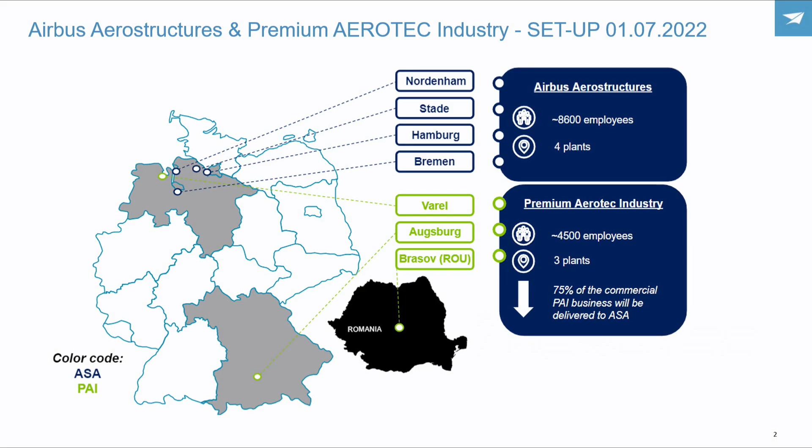Why do we do additive manufacturing? Why did we decide in 2013 to go for that? Sustainability was not the major case in 2013, of course, but if you imagine the standard material processes like casting or forging and so on, of course they are characterized by high energy consumption, and additive manufacturing provides an opportunity to much improve that energy balance, to get rid of the energy consumption, to get a smooth digital workshop, at least in the first case, if you don't look too much into the follow-up processes. So you get safety value streams by applying additive manufacturing. So that's where we go.

And you can see from the pictures, we are working with GE Additive or Concept Laser machines from the start to now, because it's a long story of continuous improvement on the machines you have to perform in order to get aerospace parts done at the end. So as I said, 10 years.

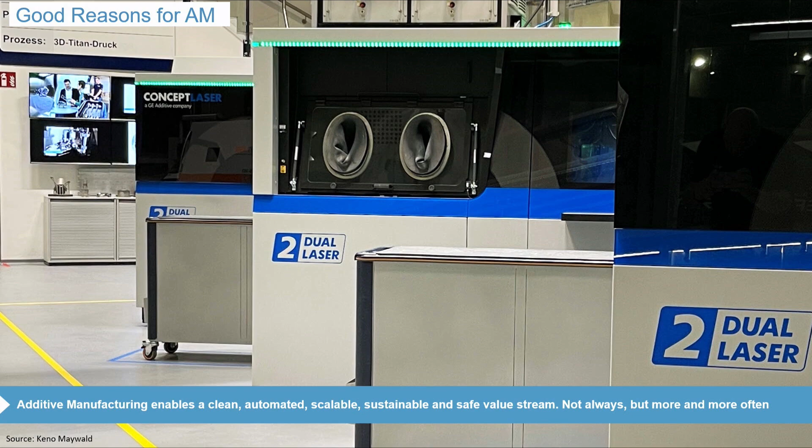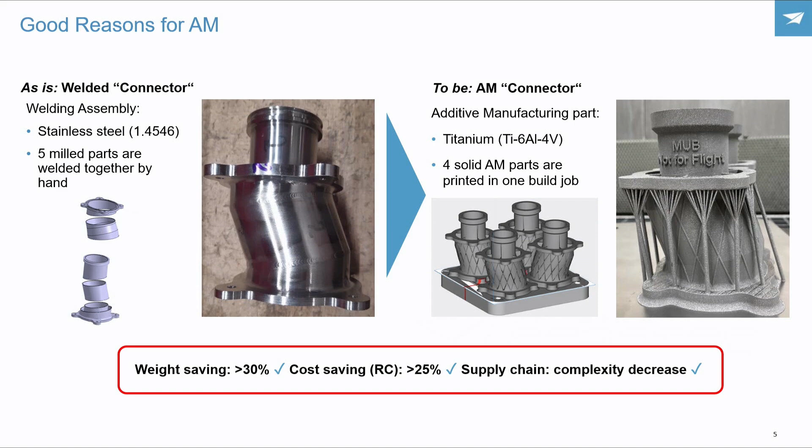And again, why? I think we heard that very often up to now. Aerospace business should be one of the best cases for additive manufacturing, since the number of pieces is always rather low, so small series production is prevailing. For safety reasons and quality reasons, it's allowed to be a bit more expensive compared to the car industry. And from former processes, you see some examples here on this page. We had processes which last long, which are rather complicated, especially if we look at such connectors made from stainless steel, several parts milled or cast and welded together. So a lot of opportunities to improve that.

The problem is, in fact, in aerospace regulations. To bring new material into the aircraft, you can count about 10 years to get the material maturity proven by the authorities, then to bring in first parts. We had a long roadmap agreed with the governmental authorities in the world to make that happen.

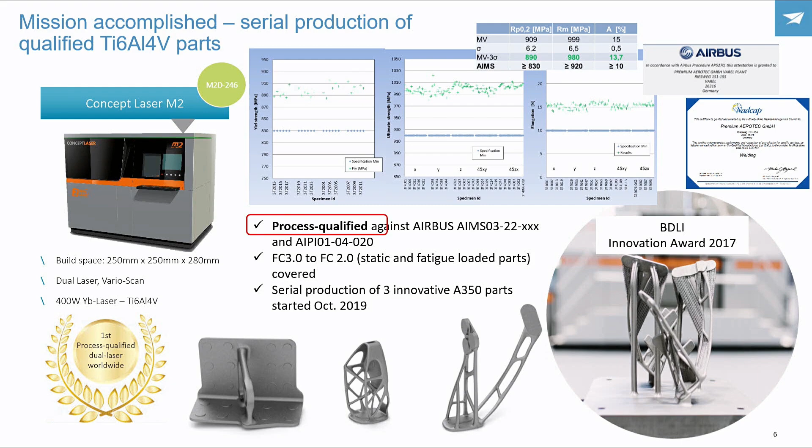And in fact, you undergo audits. I would say currently we have almost every 2 months an audit, which is not very productive, but it's taken care that we are maintaining all the processes we qualified, all the material qualities, and so on, in order to be process qualified for Airbus parts and to bring parts into the aircraft. So it's a long-lasting and, in brackets, expensive experience you have to go through, and of course that's nothing for small and medium-sized companies, because it lasts very long and it costs a lot of money.

So far where we are, as I said, we started in 2013. In 2019 we managed to achieve the process qualification. That means that we can bring titanium parts in AM design into the aircraft, Airbus aircraft.

Of course, a lot of steps were necessary to do so. So we optimized support structures. We have to qualify the material. We set up with partners, EOS and Daimler, an automated cell to produce near-net shaped parts fully automatically 24/7. So a lot of steps were taken to improve the whole AM system.

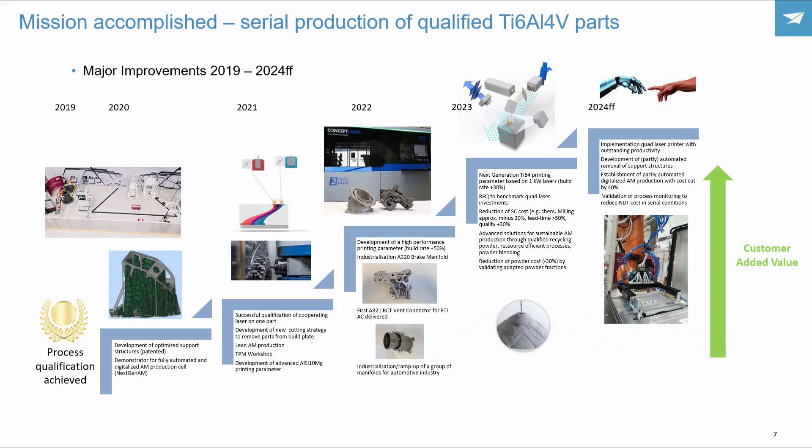Nevertheless, you can see on the upper left-hand side the first parts that we brought into the aircraft. Very simple parts, absolutely negative business case, just because the authorities required us to do very simple parts with best quality material, parts which are more or less unloaded, and you can easily imagine that the business case is then far away. But it was the prerequisite to bring further parts onto the aircraft.

So first, very simple low-loaded parts. When they are flying, then we can go to dynamically loaded parts. After that, we are allowed to do some topology optimization. And now, a couple of years later, we are in the stage that we can bring every part we want, dynamically loaded, into the aircraft.

Not safety relevant parts up to now, but at least dynamically loaded parts can be designed, topology optimized, and are allowed to fly if they are produced by us. You can see the ramp up on the right-hand side, which is still going on.

And there I can also say from the experience, we started with brackets. They look very famous, topology optimized, but in fact, there is no large business case on brackets, and your build chamber is almost limited in its space. So in aircraft, the geometrical conditions require larger parts, so then we are more talking about maybe the wire arc processes instead of powder bed.

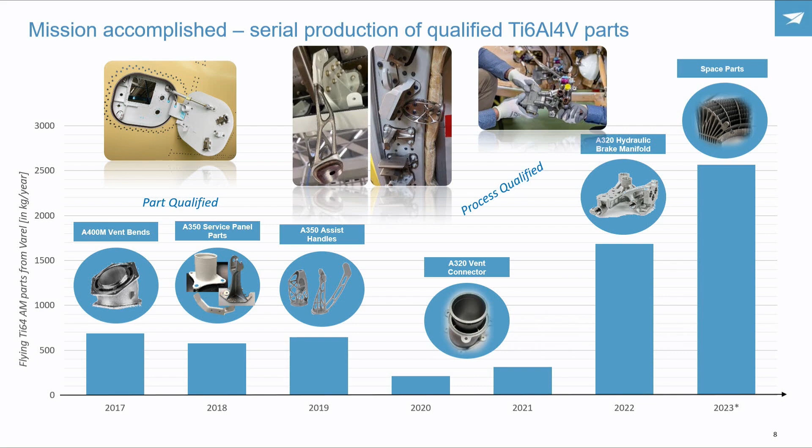Here in this case, we are focusing now on hydraulic parts, so something like manifold connectors, and these are the parts which allow us now to ramp up our business. Let's see it very steep. You see that we are now at about 2.5 tons this year of titanium. We are producing titanium parts, and it's fast growing.

How do we manage it cost-wise? Of course, we invest in new machines, and together with GE, we optimize the machines, getting better and better. We develop new parameters, increase the production outcome. So at the end, now we decrease the prices by more than 50%. Now we have positive business cases, and next steps are already

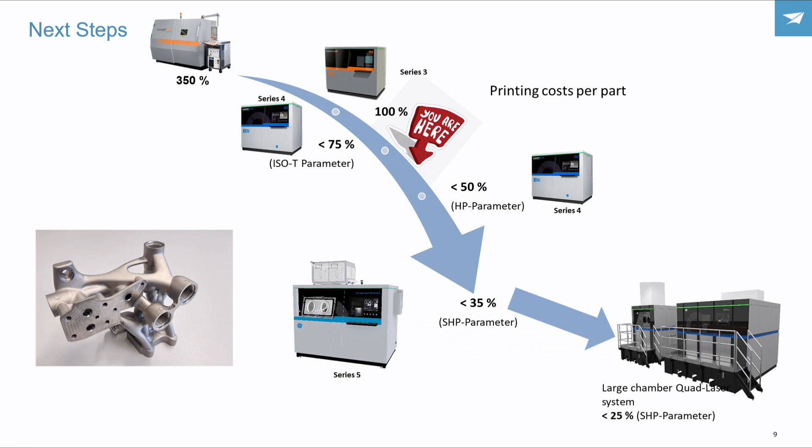going on and passing. So for the aircraft and sustainability, I would say even small parts could bring several tons of CO2 reduction if they are acting on an aircraft. So that's a sustainable business case as well. So we go for that.

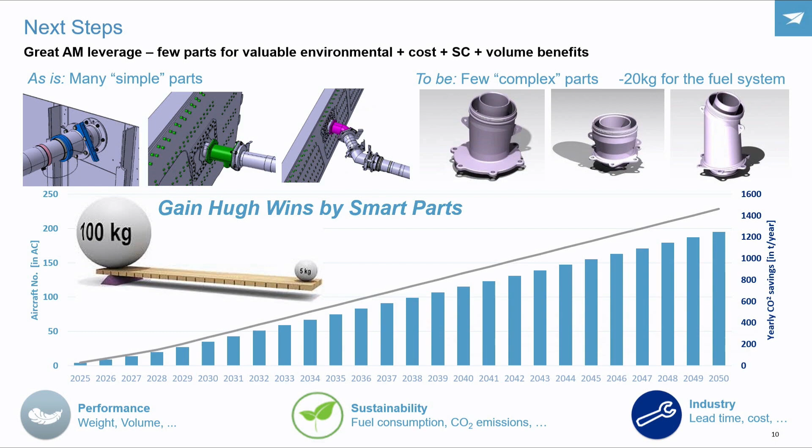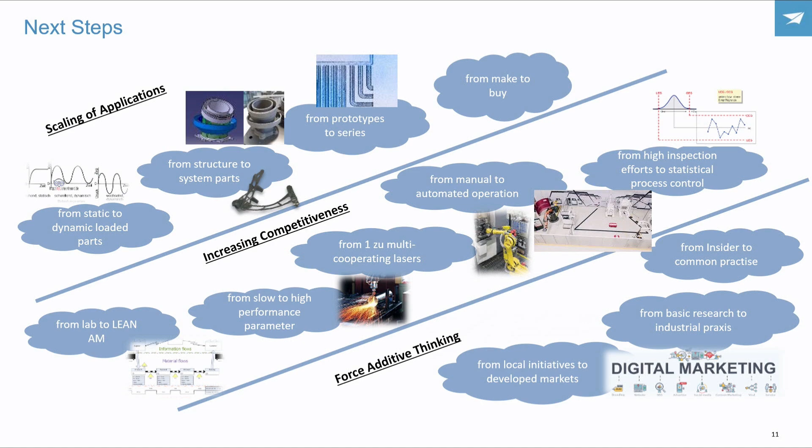And finally, from the trends, I don't want to go into too much detail through the presentation, but of course, from simple parts, we are now able to do complex parts, also parts which are dynamically loaded. And technology is developing. AM is not at the end, but it's a key technology for the future and for our future aircraft. So by that, you get the presentation later on.